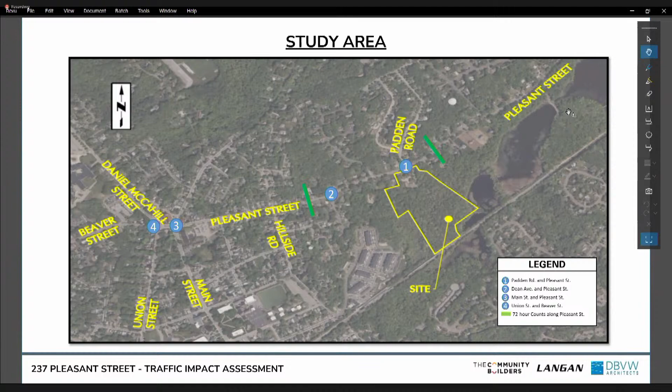Knowing our baseline for 2029, we estimated the anticipated trip generation for the proposed development using the latest data from the ITE trip generation manual, and determined that the project is expected to generate 486 trips daily, 43 peak hour trips in the morning (7 to 9 a.m.), and 48 peak hour trips in the afternoon (4 to 6 p.m.).

Based on this additional traffic being added to the network, we estimated the development impacts and determined, as shown on screen, that at each intersection the increase in traffic is not expected to be more than 3%.

We also performed a capacity analysis at each of the study intersections and found that there won't be a noticeable change in the traffic operations at each of these intersections.

We also performed a crash analysis at each of the intersections and found that all the crash rates are well below the average rates based on Mass DOT historical data.

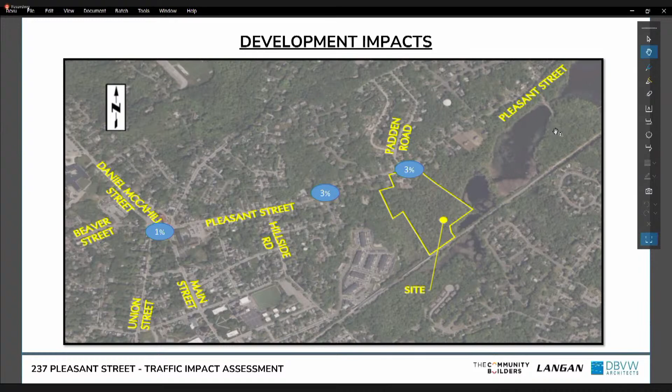In addition, just two days ago, we received confirmation from the police department that there haven't been crash reports in the latest five years at Padden Road and Pleasant Street. They did say their system is a little complicated, but at the moment they weren't showing any accidents at this intersection.

Finally, based on the speed data collected, we evaluated the sight distances at both driveways for the development and determined that both meet the sight distance requirements based on AASHTO, as shown here. This is the driveway for the church, and this is the driveway for the residential development.

That's the basis of our results for the traffic analysis. I'll leave it to my colleague Frank, who's going to give you a brief update on the site plan and an update on our conversations with the peer reviewer.

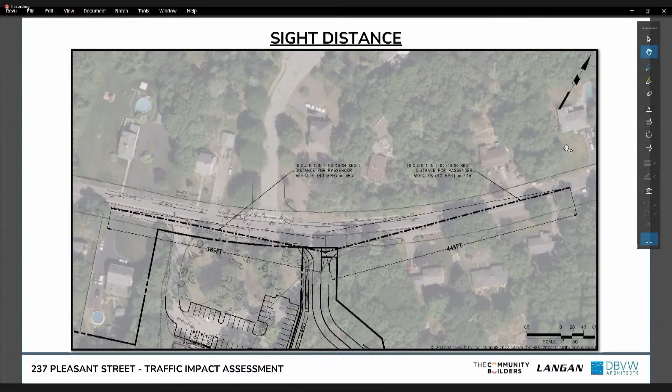Since our last hearing, we have responded to the peer review comments and made some very minor updates to the site plan. Most of our responses to the peer review's initial letter were really in the nature of providing additional information or clarifications. There were very few actual plan changes needed, but I'll briefly describe the few that were made.

One was that a guardrail was added to the driveway on the southwestern portion of the site, to the left on this plan near buildings 2, 4, and 6. We added a guardrail to the side of that driveway.

We also clarified some of the grading to get to the dumpster areas on site, with additional grading to show that those dumpsters would be ADA accessible, and we added a sidewalk to one of the three dumpsters on site.

Lastly, we added lighting to the church parking lot. Our previous plans had indicated that lighting would be provided, but it was not shown. In the revised plans, we showed where the lighting would go and provided more detail there.

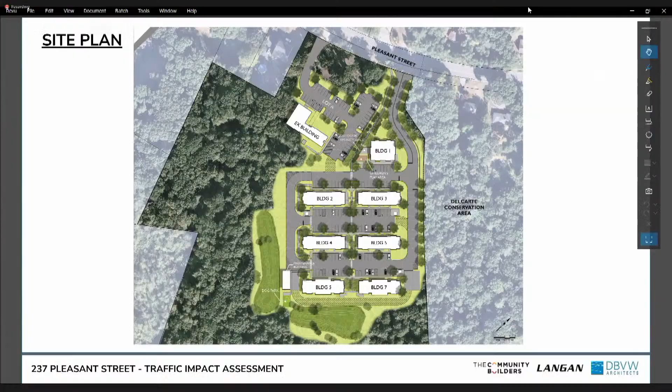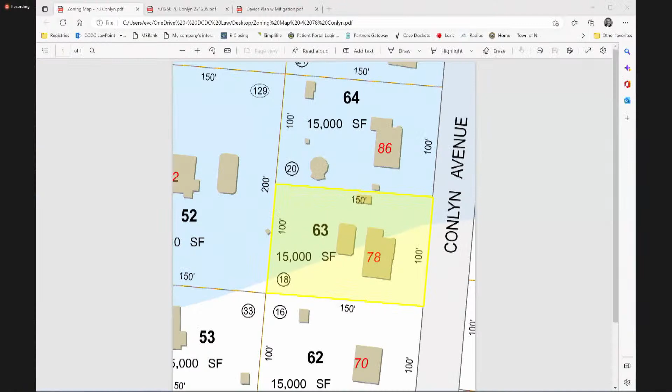So we're here for two forms of relief. The first is a 9-foot variance on the northerly sideline. The requirement is 20 feet, the proposed would be 11, so we're seeking a 9-foot variance. It complies in all other respects with the dimensional requirements.

Quickly, through the variance criteria: unique conditions affect the lot but not generally the zoning district, which is that the proposed variance only impacts 78 Conlyn by allowing the construction of an attached garage. No other property within the district would be affected.

Second, that literal enforcement would involve substantial hardship to the owner. The proposed variance is not a substantial detriment to the public good. It only impacts 78 Conlyn Avenue, and not permitting the variance would deprive them of a garage, where many other homes in that neighborhood do have garages, and would also deprive them of the ability to improve their home and improve its value, which would also improve the value of the surrounding homes.

Lastly, that the variance will not substantially harm the public good or derogate from the bylaw's purpose. The bylaw's purpose is to make sure there's not overcrowding, that structures aren't right on top of each other. Similar relief has been granted; there are other homes in the area with similar setbacks and garages, so this would fit in nicely with the existing neighborhood and not harm it or derogate from the intent of the bylaw.

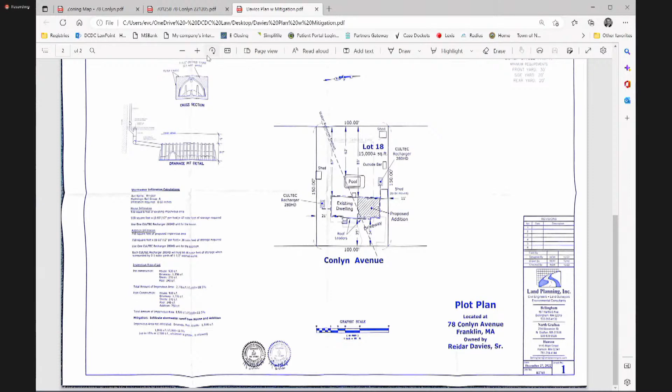But first, I want to know because I can't read it on the plan if it is there. The applicant is proposing to build a 24 by 30 foot garage. Where is the 24 and where's the 30? Is it the 30 from front to back or from side to side?

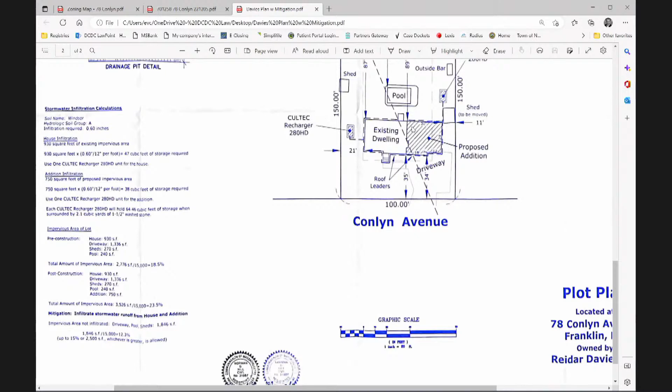Yes, if I may, this might help to blow it up a little bit. So the 24 is front to back, and then the 30 is this stretch here in back. Oh, okay, I can see it on that one there a little bit better. Yeah, okay, I can't see it on this one at all, but anyway, the one I got in front of me.

Okay, I guess the question could be, the standard width garage, the standard 2-car garage would be 24 by 24. What prompts him to want to go 30? The question's just out there. That's all, I'm just curious.

Reidar, could you or Paul possibly shed some light on that? Yeah, through the chair, if that's okay, Mr. Chairman. One was aesthetics when we designed the plan. Two is usability. I typically drive pickup trucks, and to be able to get a pickup truck in there, I need a little bit bigger width than one of them. As you can see, the front span is 18 feet on the left-hand side of the new proposed garage, and then the other side's 12 feet for a passenger car.

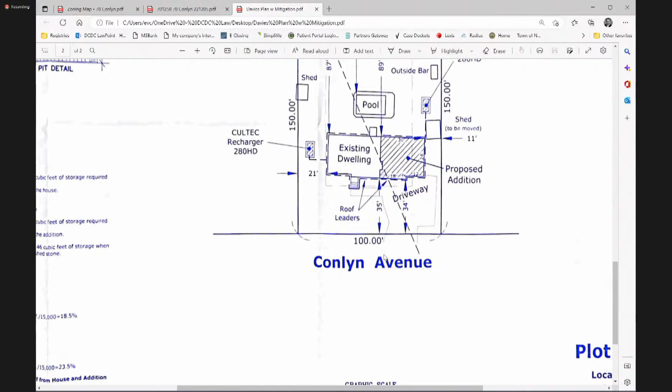Okay, typical, like they do in Florida, 18 is usually like a 2-car garage. The other side would be maybe 8 feet, but would be a golf cart garage. But anyway, the other question I got is, because I can't really make it out, maybe you could just state it out. What's the pre-existing condition as far as coverage, impervious coverage?

If I may, Mr. Chairman, Bill, could you take the board through that or answer that question for the chair? Yep, can you folks hear me? My video's not working, I'm hoping the microphone works. Yeah, no, I can hear you fine.

Okay, yeah, pre-construction coverage is 2,776 square feet, or about 18.5%. And post-construction is 3,526 square feet and 23.5% impervious coverage. So in order to mitigate that, we're proposing infiltrating both the existing house and the proposed addition, which essentially brings our impervious coverage down to 1,800 square feet or 12.3%.

Okay, I think that's the first time I've ever got an answer from an engineer, the number that I'm looking for, and that's exactly what it is. You're probably over a little bit right now, correct? Yeah. And with the other, you're going to be more, but you're going to mitigate it down. You're going to be better than what you are pre-construction with the mitigation. Absolutely. Okay, great, that's all I'm looking for.

Megan, any questions?

Just a comment - I think the 12.3% sounds fantastic, better than it was. That's all I have, Mr. Chairman. Chris? No questions, Mr. Chairman. Thank you.

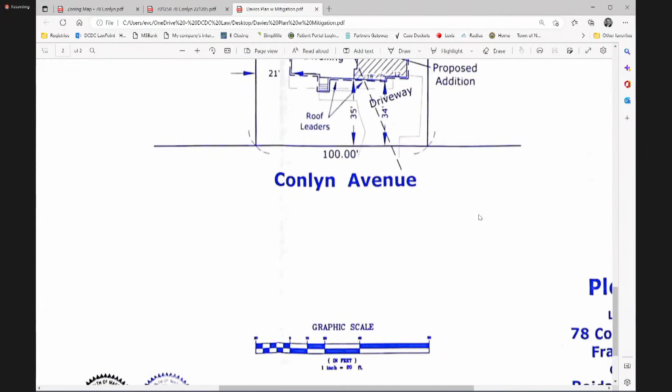Yes, I do have a question, Mr. Chairman, about the application itself. Looking at the last sentence, I'm not quite sure what they're looking for. It says the building permit is denied without a variance and a special permit from the ZBA. So would they need dimensional relief - would that be the sideline setback?

Yes, because they're in a water resource district, they can't exceed 15%. So they're already there before they do anything, by putting the addition on and putting the CULTEC systems in. It'll mitigate it back to under the 15%, which is usually what we look for when they're doing it.

Right, that's fine. I just want to check one more time to make sure there's no abutters. We do have - the garage is probably the size of the existing house. If you look at it from Google Maps, it's small, it's a tiny home. Well, they're all tiny down there. I'm sure he needs it with his truck, so I have no further questions.

Years ago I always said this was like a subdivision stopped in time, up until maybe 10 years ago, most of the people that lived there were the original owners of the house. But since then people have come and gone, and now that the new people are in there, they're trying to upgrade the neighborhood, upgrade their own properties to make the neighborhood better too. I don't really have a problem with it, considering it's on sewer and water, so it would be consistent with what we've granted in the neighborhood before.

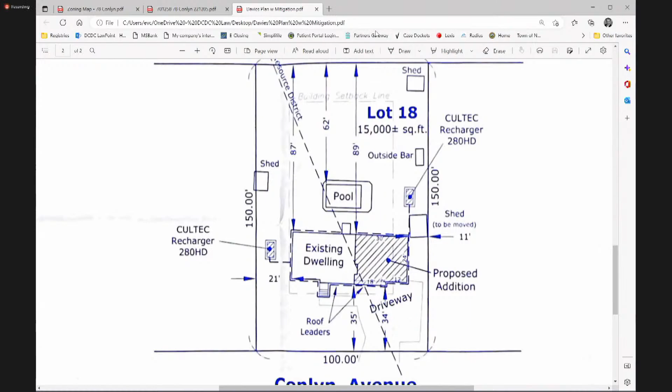Everything's good. All right, with nothing else to be said or commented on, I'll entertain a motion to close the public hearing. So moved. Second it. Motion made and seconded to close the public hearing.

Any discussion? Hearing none, roll call vote. Philip? Yes. Archie? Yes. Chair votes yes. I'll entertain a motion.

As shown on a drawing dated December 27, 2022, entitled plot plan located at 78 Conlyn Avenue, Franklin, Mass, by Land Planning, Inc. of Bellingham, Massachusetts.